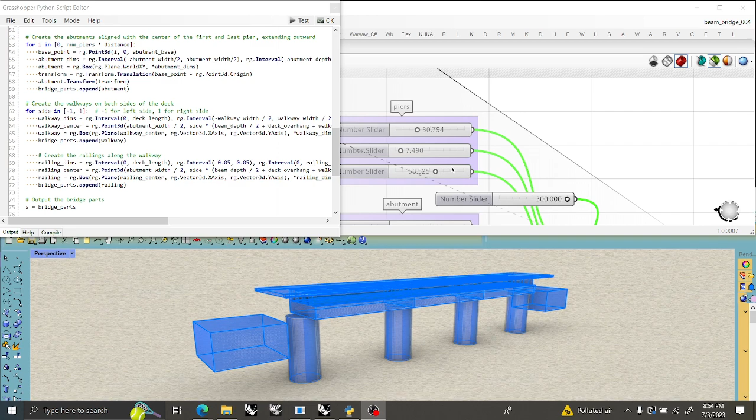Welcome to Wickerson Studios. Really happy with this. Took over an hour to do it, but I made an 18 parameter bridge for a beam bridge right here. Fully parametric, 75 lines of code.

Super excited, so let's take a look at it. Let's change up the height, and you can change the height of that bridge whenever you want. Let's bring it up to here. Make a second bridge. We can change the radius of those piers if we want them thinner, but I think they'd be nicer served thicker.

Actually, we'll make them thinner, and we're just leaving the other ghosted form on it as well. Maybe we'll leave it as an X-ray drawing. No, I kind of liked it. Let's see what it looked like as a pen and ink drawing. Pretty nice. Well heck, it still looked pretty nice as artistic.

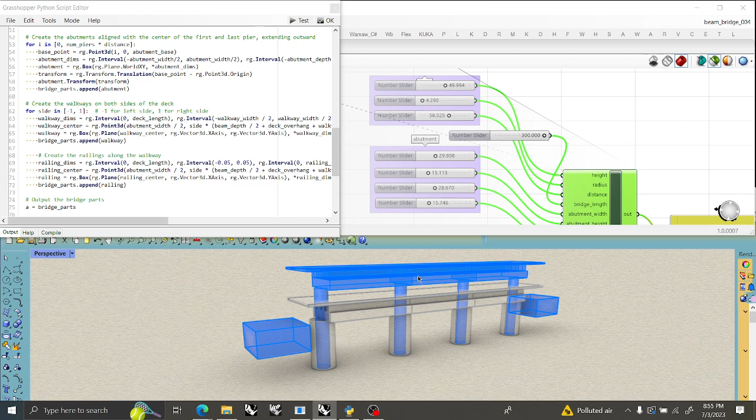Let's change the distance between those piers. As we shrink that, you'll see we'll get an extra pier as we go. Really nice technique, I really like how I've scripted that. It took some play, but it was worth it.

So let's crank it up so there's a whole bunch. That's nice, so that's changed a little bit and made it fit. It's kind of funky still around the abutments. It needs a little bit of work, but I think it works fine.

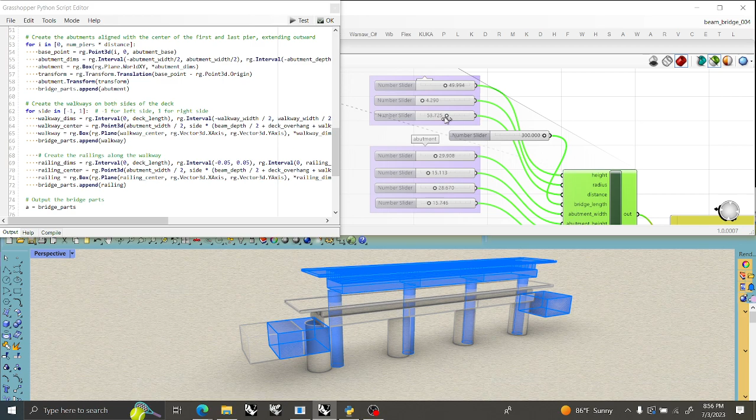Let's just leave it at, let's do 3. If I'm gonna do 3, let's do 5, but there is a problem with that abutment coming too close to that pier, so I have to fix the script a little bit there.

Then let's take a look at the bridge length. We can extend that, which is going to change things, and it starts to break down, so I want the abutments... Oh, I can shorten the abutment to make up for that.

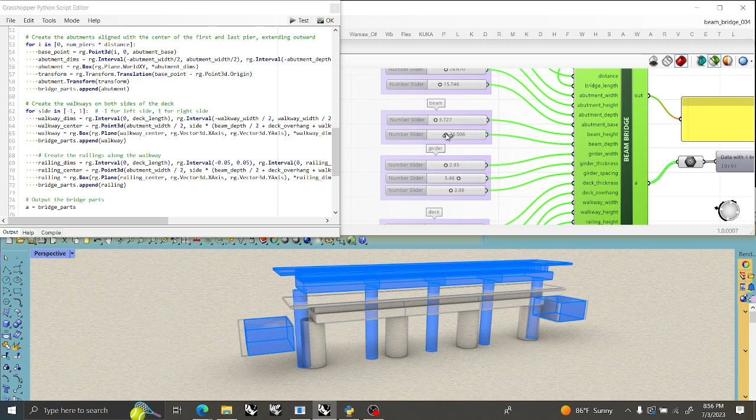Okay, so it is fixable for the beams, and then the depth of the beams I can change. So the beams are actually these things, these are the girders. The beams here, if I want it to be wider, I can stretch it out and I can pull out some more girders.

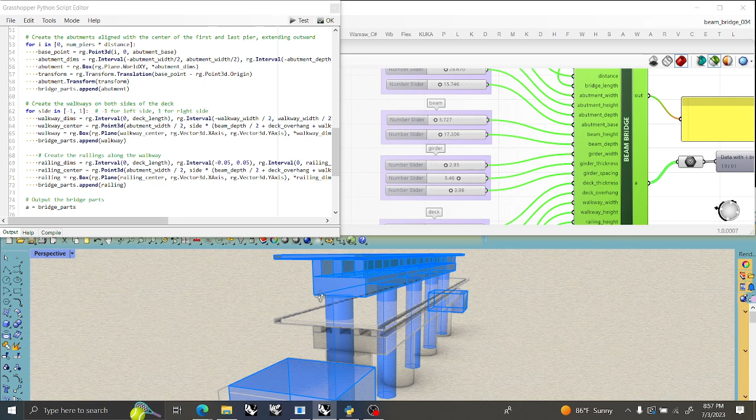But since it's thinner and smaller, just use 3. And you could center them as well. You can tell the script, I think 3 is fine there. I'm going to change these into I-beams at the end. That's my plan. Then let's go down to the girders.

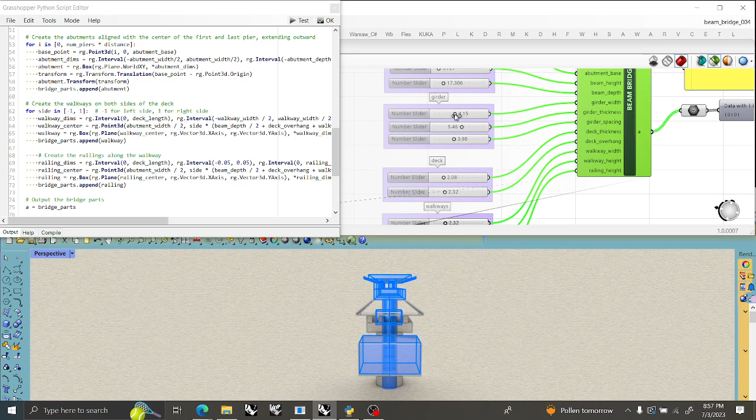Now the girders are nice because you can change the thickness of those. So I'm going to keep them real thick. Wait a second, that's not the girder. Girder, I'm going to keep them real thin so I can fit 3 on there. So that's pretty nice, I think there was 3 before.

I can raise them, I can lower them. I can extend them up almost like an aqueduct to get something in between. If I push it to 2, that's kind of nice, just 2 girders. Oh, I love this model.

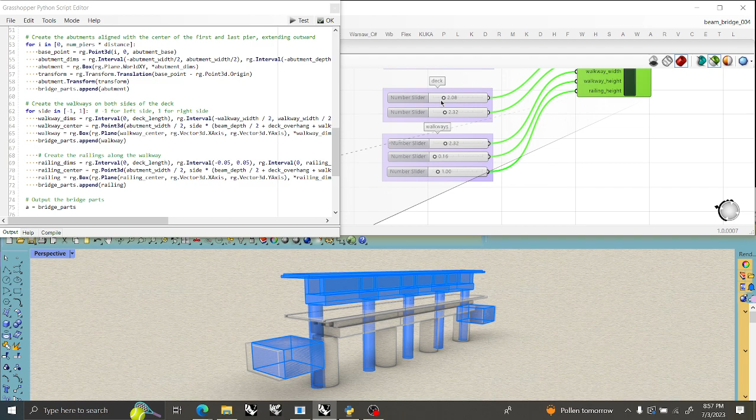And the deck, I can thicken the deck to make it thick, or I can keep it very thin. It's got these little tiny walkways on the side of it, which are really nice, kind of like water walkways for collecting water. I think maybe I'll thicken that. I'll widen that really out so the walkways are nice and thick. Not that I feel like walking on that.

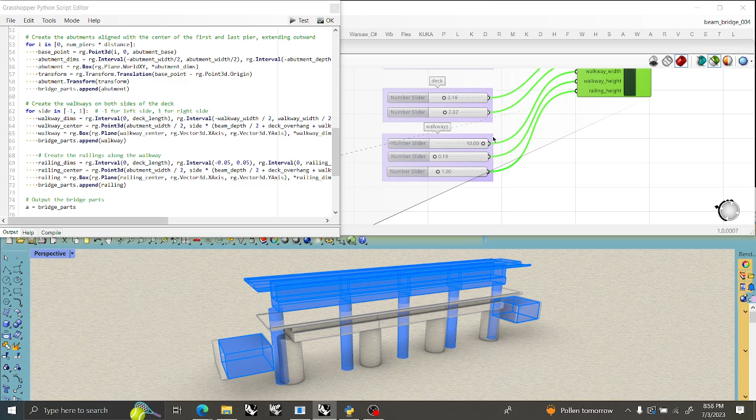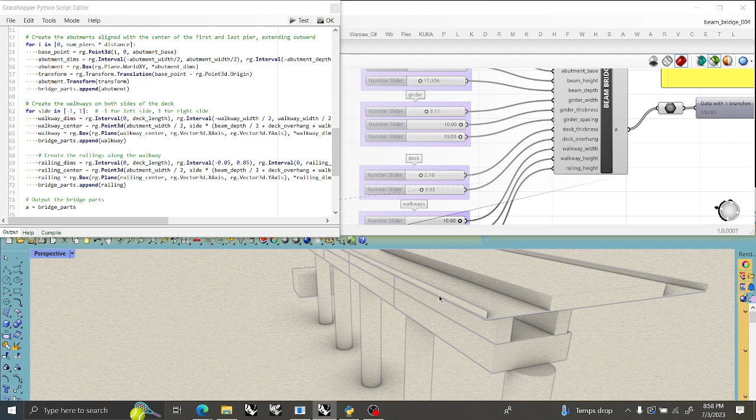Now all I want to do is make these more of an I-beam structure. I want to change to a plate girder, a concrete girder, or a box girder. I haven't quite decided how to treat those. And I may make this area a little thicker, and this one a little thinner. And I might make it bow so there's a bit of runoff. But there's a lot of funky stuff you can do to it.

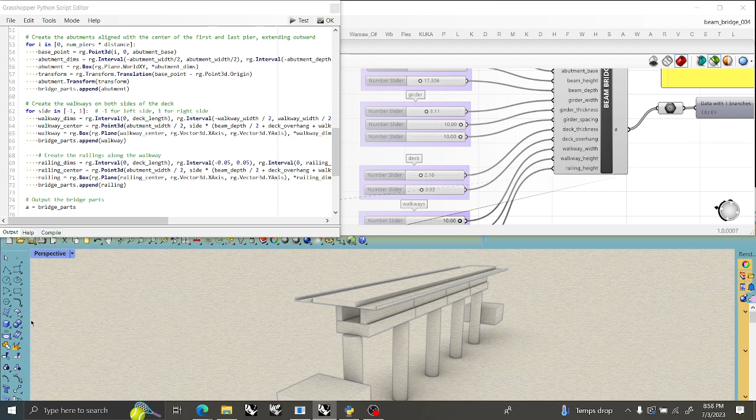I don't know if I like that model better than the last one, but it's pretty nice to play around with. Let's take it back to both views there. There you go, you get top view. Nice little parametric model to play with.

So I'm going to stop that as a video recording. I'll put that up and we'll talk a little bit about it. It's 75 lines of Python code, which pretty much debugged and wrote itself through many iterations. I'm trying to keep my scripts under 100 lines, not to intimidate anybody, let alone myself.